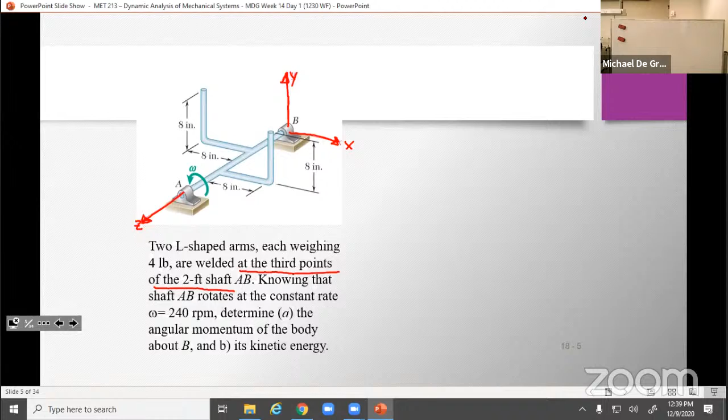Let's try that again. 2/3 of a foot. 2/3 of a foot. Okay.

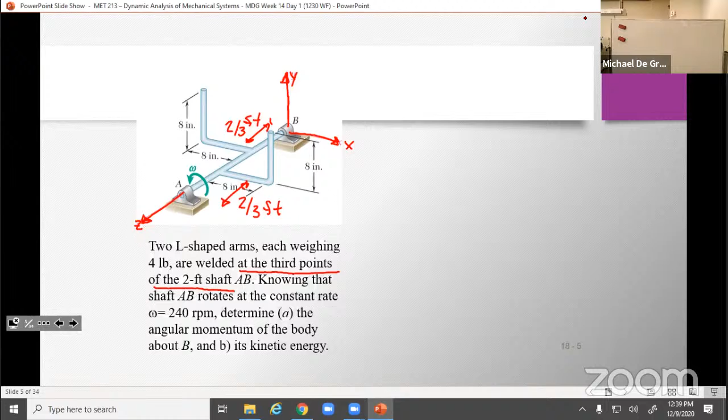So what do we do here? What's the general strategy? The part rotates about the axis AB, so everything is rotating about this central axis. First we need the mass moment of inertia matrix, so we need our IXX, IXY, IYY, IZZ. We need all those. So that's the first thing we're going to need to do.

Then we can compute the angular momentum of the rod using the moments of inertia. This is not an easy read off a table, this is going to be a complex geometry, so we're going to have to use an L-shaped rod and a regular rod to determine our moments of inertia. And we're going to compute the kinetic energy. So there's 3 parts to this: find the matrix of your moments of inertia, compute the angular momentum, and compute the kinetic energy from the angular velocity.

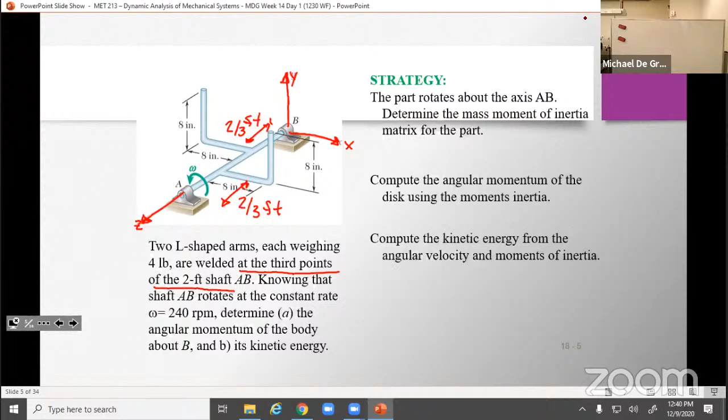Okay, so here's my thing again. What are my knowns? I know that the whole thing weighs 4 pounds, which means the mass has to be 4 divided by 32.2, which is 0.12422 pound-seconds squared per foot. That length, lowercase a, is 8 inches, which is 0.667 feet.

Omega z is equal to omega, which is 240 RPM, which I convert to radians per second. How do we do that? Multiply by 2 pi over 60 to get rid of the minutes, so we get 8 pi radians per second. We have no rotation in the x direction, there's no rotation into the board, and no rotation vertically around the vertical axis. This just rotates around z.

So we need to find HB and T. Remember, T is our kinetic energy, and H sub B is the angular momentum about point B. Since there's only rotation about the z-axis, what relationships are helpful for us?

So what relationships are helpful for us? We're going to use HB in the x, we need IXZ, so we need all of these: IXZ, IYZ, and IZ. Remember that long equation that we put up on the screen.

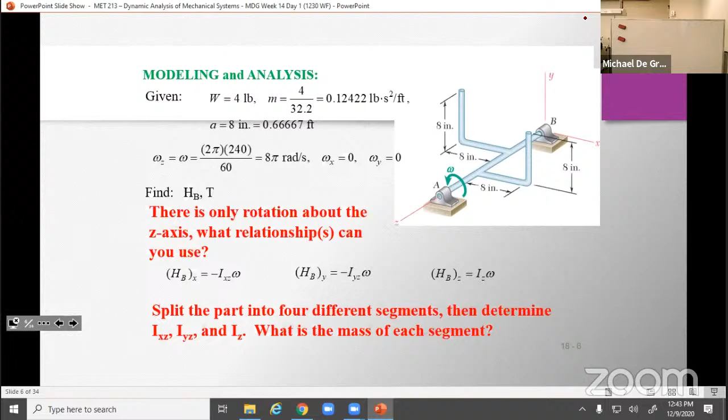So we're going to split it into 4 segments, right, that have 0.06211 pounds seconds squared per foot of mass.

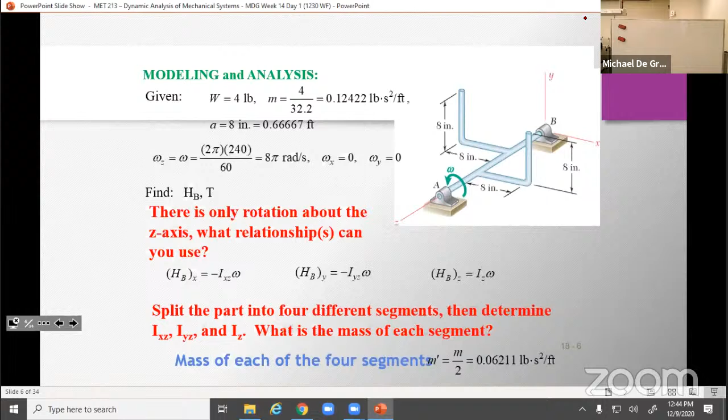So we've got to fill in this table, and we're not going to, so how do you fill in this table? You got to go into the charts and figure out where. So what are our 4 segments here? You got this segment, this segment, this segment, and this segment.

Okay, so how do we find IXZ and IYZ from these? You go into the table and you look at what it is for a bar. You know that the length is, right? And we can figure it out from there.

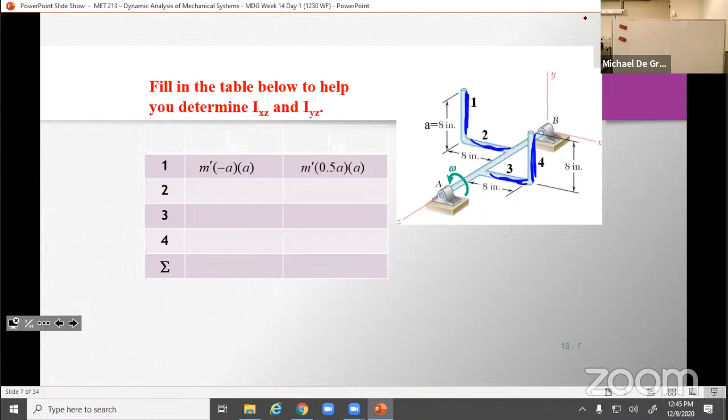So it's M prime, right? It's the mass times negative A times A, and the mass times 0.5 A times A. And this, you can't really see it here because of editing reasons, so that's IXZ and this is IYZ.

And again, this comes from the table. You go in for a rod and you see what it is, and you just go with it. We do the same thing for part 2, same thing for part 3, and for part 4. Again, these equations come from a table or a chart, which you will have if you need them.

And then we add them all together, because hopefully this is jogging our memories from statics when we first heard about moments of inertia, where you fill in the table and you have all of your composite pieces. Then if you want the total moment of inertia for something that's made of composite pieces, we add all of them together.

So if you're looking at the tables, they have pictures of the geometries and they'll identify what the different lengths are that you need.

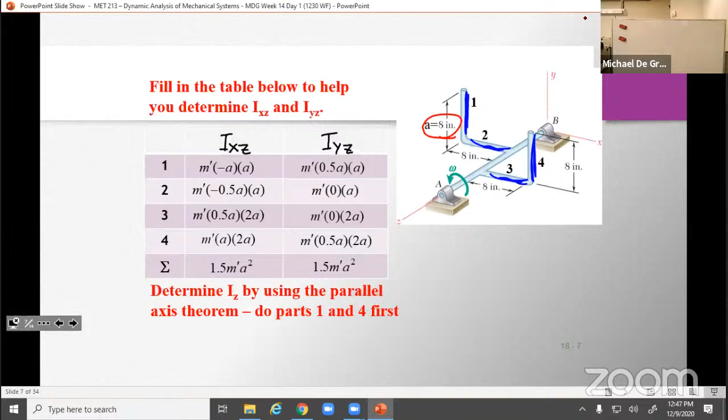And remember, what is the parallel axis theorem? It is this: it is the moment of inertia I sub z, plus the mass times the change in, times the mass times 1/2 a squared plus a squared.

So what is it? It is the moment of inertia plus the mass times the distance that you are squared, the distance that you are away from point B squared. That's what it is. Does that make sense?

Remember, each one of these lengths here was also 8 inches, because 2/3 of a foot should be 8 inches. So this is 8 inches.

This is 8 inches, and so if you're looking at how far from point B this part 1 is, that's going to be m prime d squared, but that d is 1/2 a squared plus a squared.

Parts 2 and 3 are also equal to one another, so the horizontal parts are also equal to one another, and that's just 1/3 m prime a squared.

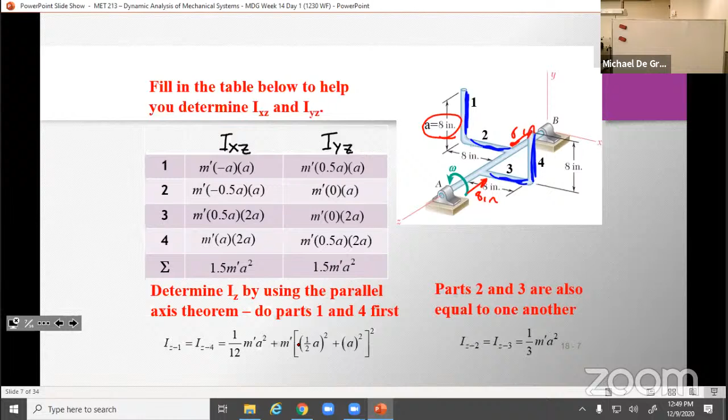Once we have this, this is important for us calculating our angular momentum h.

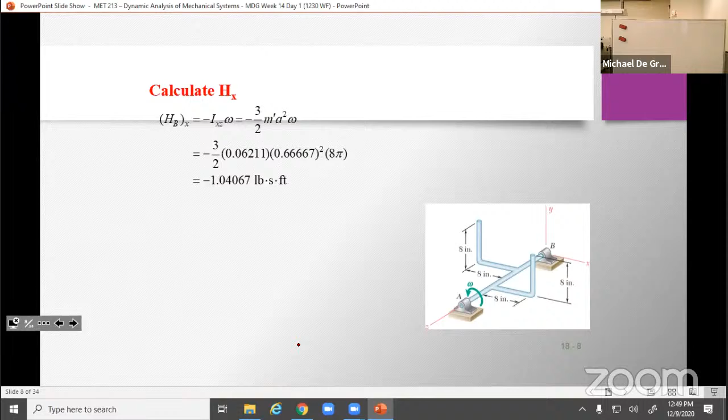So h in the x direction about point B, what is that? Well, that's going to be negative I xz omega. We know I xz, we know omega. We can plug all that in, and we get the angular momentum in the x direction.

We do the same thing in the y direction. We know the equation for the angular momentum in the y direction about point B. Look, in the x and y direction, it's the same.

And H z is about 2.3126, right? So once we figure that, the hard part here is figuring out I, what is I in relationship to point B. That's the hard part.

So my total vector is just the x component in the i direction plus the y component in the j direction, plus the z component in the k direction, right? And that's the first thing they asked us for, the angular momentum about point B.

And I know that we didn't go over how to calculate Ixx, Iyy, Izz, all the different I's, right? But most of the time, most things, even if you do composite ones, can be added back together.

You can at the very least find it about the center of gravity. Because for this thing, where would we expect the center of gravity to be? Well, if it was just the bar, it'd be in the center. These two are evenly spaced though, and opposite, so it's still going to be right about in the center. Probably lift it up off the bar a little bit because there is some mass on the upper half here. So in the z direction you'd stay the same, but we will lift off the bar somewhat, based off of the handles being there.

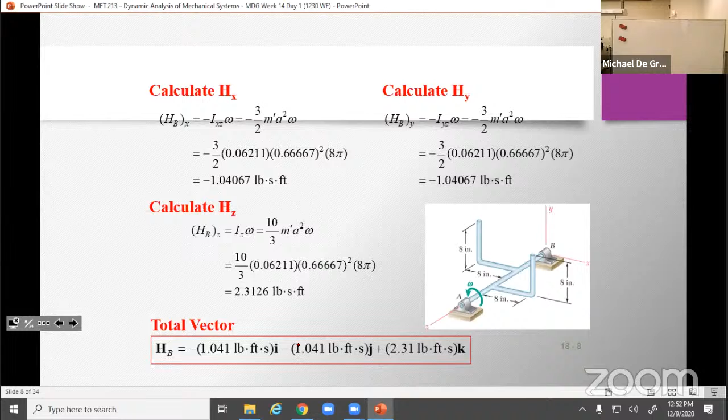What about kinetic energy? This should be a little bit simpler, right? Because the kinetic energy is 1/2 I omega squared plus 1/2 mv squared. We have to do it in all the directions, and this isn't going to be translating, so we shouldn't worry about it. This is a pure rotation.

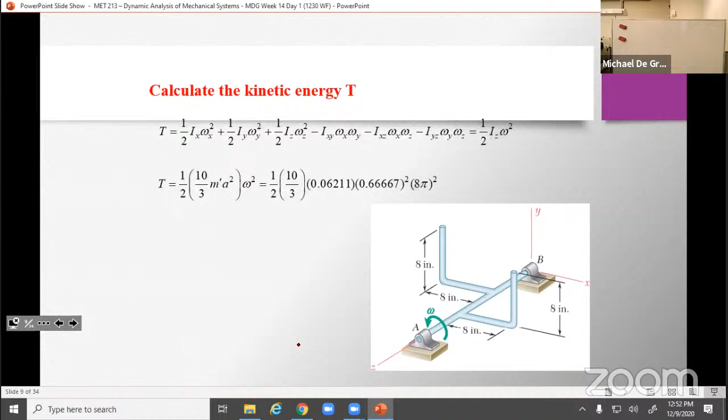So we have to take the x component, the y component, and the z component, and we have to take the off-axis components as well. We calculated all of those already. We know Ix, Iy, Iz. We know Ixy, Ixz, and Iyz. This is now plug and chug after you get I. And we're left with this.

Another thing to remember, right? Those are 0. Those are 0. Those are 0. That's 0. And that's 0. Remember, we only have angular momentum or angular velocity in the z direction. All the other ones were 0. So anywhere that omega x or omega y shows up, that goes away.

And so all we're left with, like it shows us here, is that one term: 1/2 Iz omega squared. We calculated I sub z earlier. There it is. Plug in, chug.

So again, in my opinion, the difficult part of these problems is not applying the kinetic energy formula. The difficult part here is calculating I correctly, if you have to do it. Now, we've done a couple problems where we don't have to calculate I, where we just use whatever is on the table, and that's fine too. But understanding how to come up with I—remember, if you have a composite geometry, you break it into the pieces that you know. Always break it into the pieces that you know. Like in this case, I've got a rod of length 8, in each of these cases.

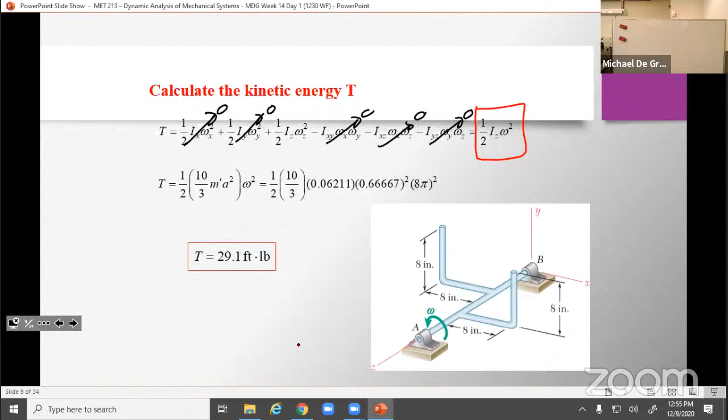So what about motion of a rigid body in 3 dimensions, right? And we've been talking about this. So angular momentum and its rate of change are taken with respect to the centroidal axes. So we measure the centroid, and the centroid has some x, y, and z prime fixed orientation. And the transformation of omega into H sub g is independent of the system's coordinate axis. Okay, so what does that mean?

Well, it just means that it's convenient for us to use a body fixed axis Gxyz, where the moments and products of inertia are not time dependent, right? So as this moves in 3 dimensions, if we have a rotating frame of reference, then we have to remember what happens when we have a rotating frame of reference. We have to do all these Coriolis effect things, right?

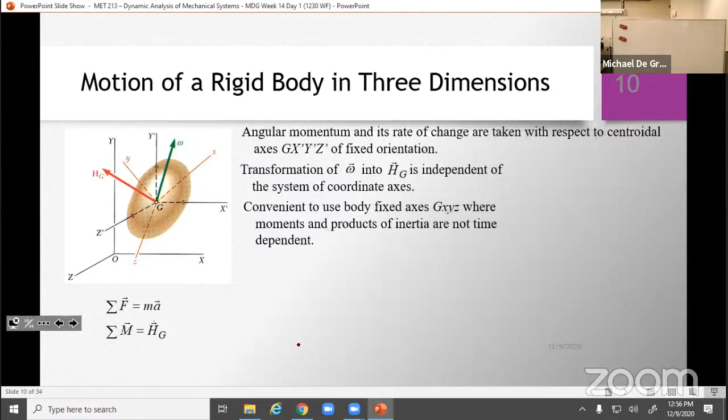We have to measure the relative position in time of this object. If we use a fixed axis, then we don't have to worry about the time dependence of this. I don't have to worry about how it's rotating and what angles it's rotating through. So we can define the rate of change of H sub G as the angular momentum about the center of gravity with respect to the rotating frame.

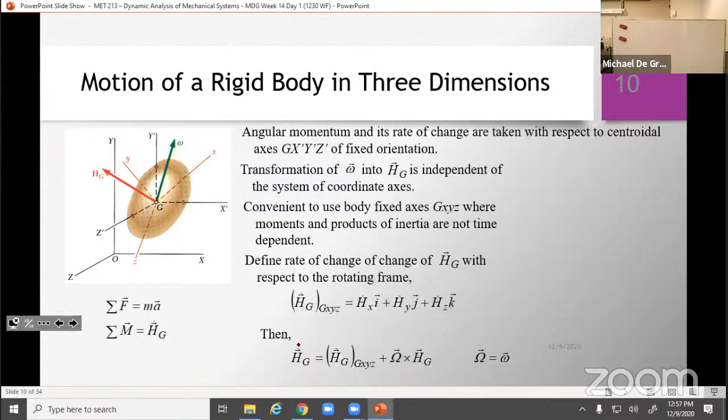And if we use this rotating frame, this is all the stuff that we talked about earlier for 2 dimensions, but we're adding a 3rd dimension. So omega is equal to omega, and Gxyz is chosen to correspond with the principal axes of inertia. And hey, look at this. These are what are known as the Euler equations, right?

So the sum of the moments about the x-axis is equal to I bar x omega x minus (I bar y minus I bar z) omega y omega z. So these are a bit more manageable than the angular momentum equations, at least I think so, because we don't have to worry about the off-axis terms. We don't have to worry about Ixy, Ixz. You just have straight Ix, Iy, Iz.

So what is this telling us? It's saying that the system of external forces and the effective forces are equivalent for general 3-dimensional motion, since the system of external forces is equivalent to the vector couple mA and HG. So the sum of my moments has to be equal to the change in my angular momentum, and vice versa.

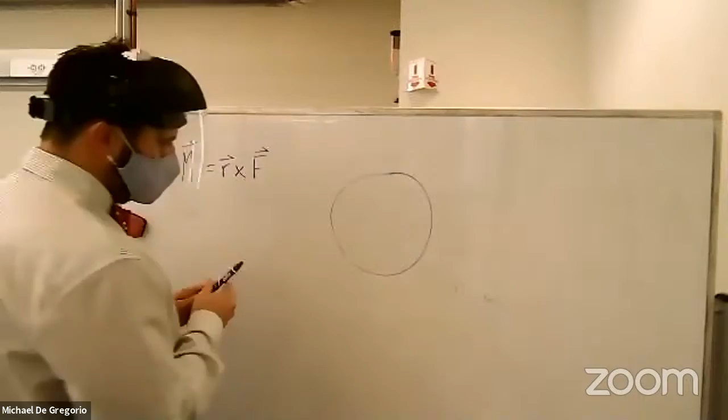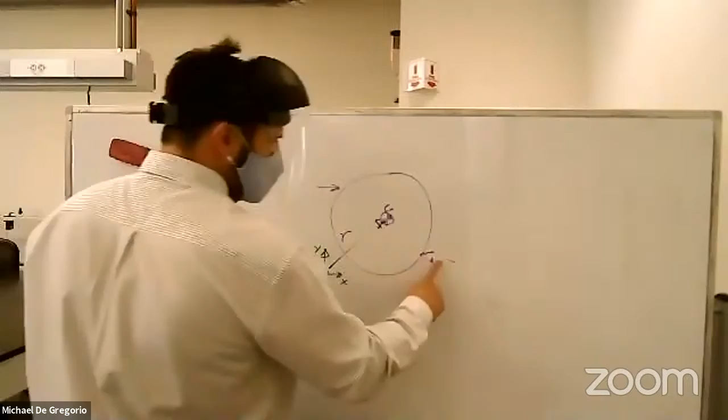Okay. So if a moment is r cross F, and say we have something that is symmetric in space. And I'm going to measure it from, here's my coordinates, something like that. This distance to G is R. No matter where I put a force, if I have a force here and here, if I break this into X, Y, and Z components, let's just say I'm applying a force here in 3 dimensions. So I've got this X, this Y, and I've got an X, Y, Z force right there.

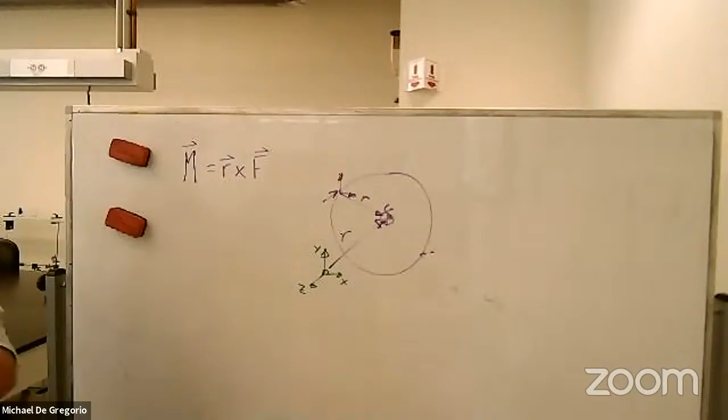That distance R is symmetric in all directions, right? This R, because it's the radius of a circle, because it's symmetric, we're going to get two portions that cancel each other. If it's not symmetric, think about it in a two-dimensional setup. Something that's not symmetric, if I apply a force here and we're rotating about there, the total distance to this point is not symmetric in two of my planes. And so I can't just cancel. I will have an x component and a y component that do not cancel.

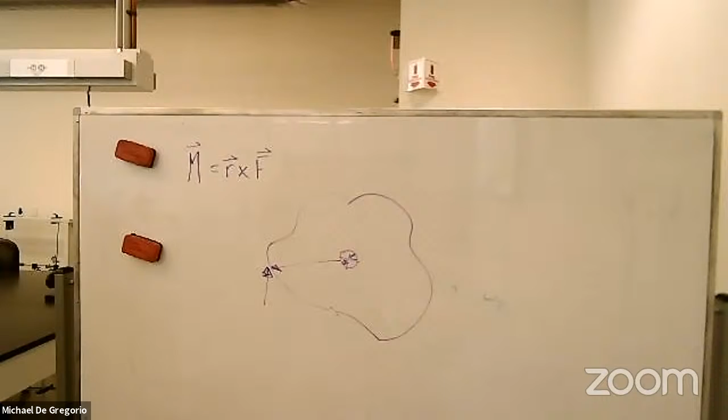So not being symmetric is not problematic, that's not the word I want to use. It's not that it's problematic, but not being symmetric makes it so that we can't just cancel things, because the x direction component and the y direction component are not going to cancel when we are not symmetric. We still have some angular velocity that plays a role.

All right, so if you had a shaft that looked like this, a rotating shaft requires both static, omega equals 0, and dynamic, omega not equal 0, balancing to avoid excessive vibration and bearing reactions. So you need the statics and the dynamics here. We need to be able to discuss the static loading. We also have to discuss the dynamic loading, when this is accelerating, so that we can determine whether or not we have excessive vibration caused by this being not a straight line.

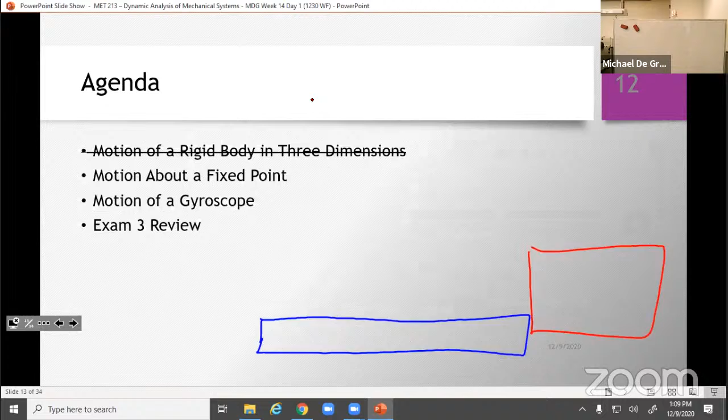Let's go back and look at them. There they are. So according to this, I'll go back and read what it said. You can use Euler's equations for the provided x, y, and z axes to find the moment. Can we?

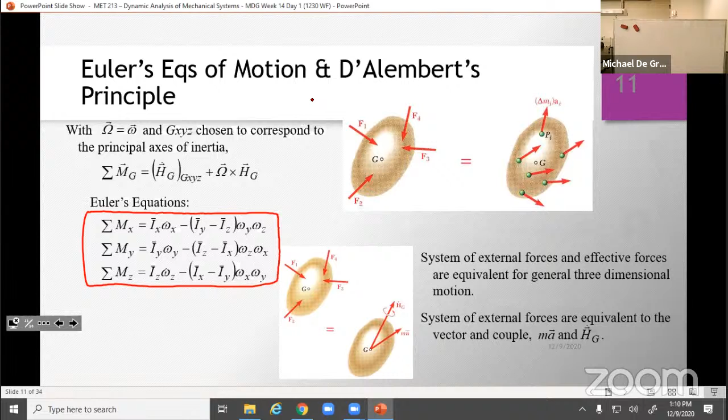Can we? Well, isn't the y direction going to be 0? The z direction is going to be 0, because we only have omega x. So the only one we're left with is the sum of the moments in the x. So I guess we could, but not super helpful.

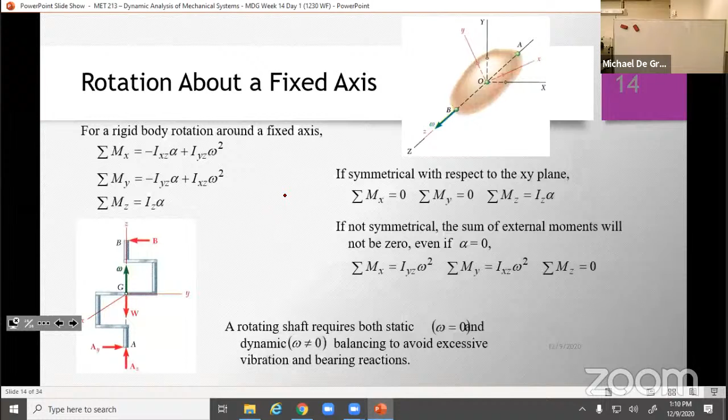The only non-zero moment will be about the x-axis. I think we've just proven that it's not, right? Well, actually we did just prove using Euler's equations that it is, right? The only non-zero moment will be around the x-axis. Why? Well, this is rotating through a fixed point. So let's go back to this equation here. Where is it? Let's go back to this one in the red box.

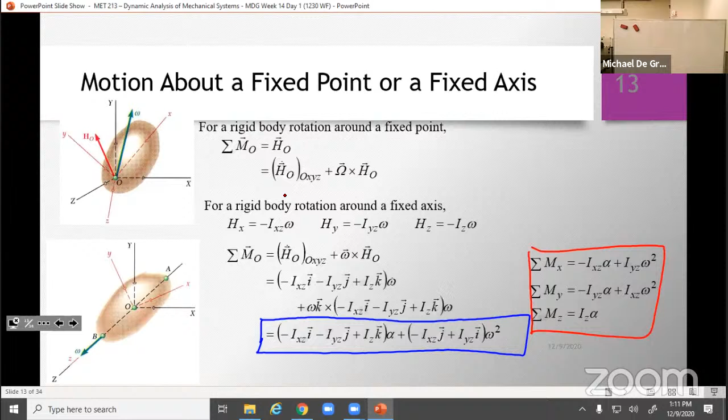All right, we're rotating about a fixed axis with the specified omega. So x, y, these are all, we can't use Euler's equations. The whole box here gives us moments in the x, y, and z direction, because there is an alpha. Alpha is non-zero, because our omega is changing with time.

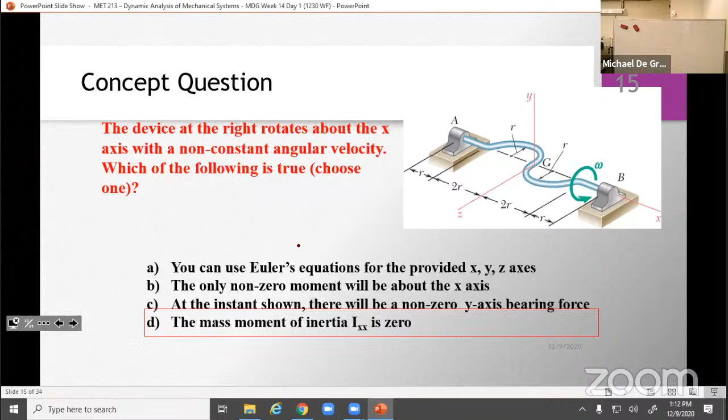So when we hear the word couple, we want to know about moments. So we're going to have to use these moment equations. A force couple. In case we forgot, draw it on the board again. Here's a generic bar, and I'm going to apply forces that are both the same distance d away from the center of rotation. That's what I've got. So I can replace both of these forces.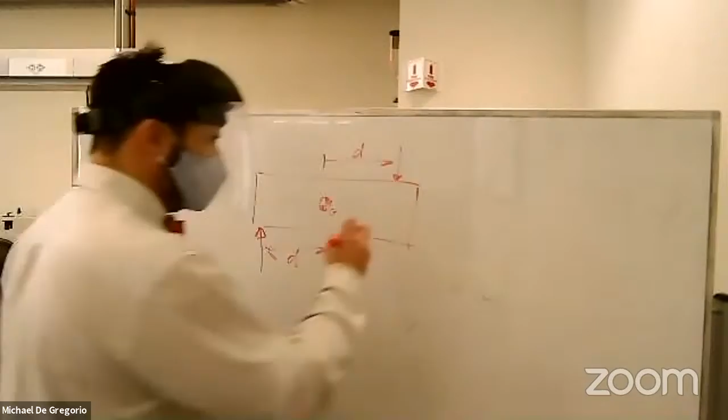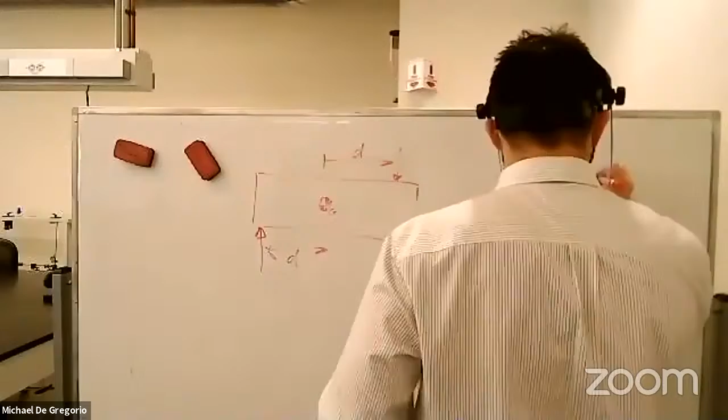This is equivalent to a system in which I have a single moment that turns this. And you can't see that color whatsoever. But there's a moment. You can kind of see it. Not really. Let's try that again. Is that any better? There we go. You can see that.

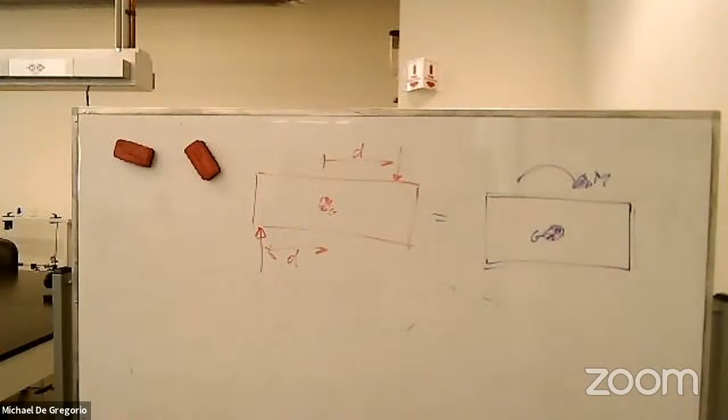So this system in red with two forces, one pushing up on the left and down on the right, is going to cause a rotation, which we can describe with this moment. So there's some moment that can be equivalent and take the place of these forces. That's what we're talking about when we say couple. So we need to find the magnitude of the couple, the magnitude of this moment that's being applied here. Right, so that's just a repeat.

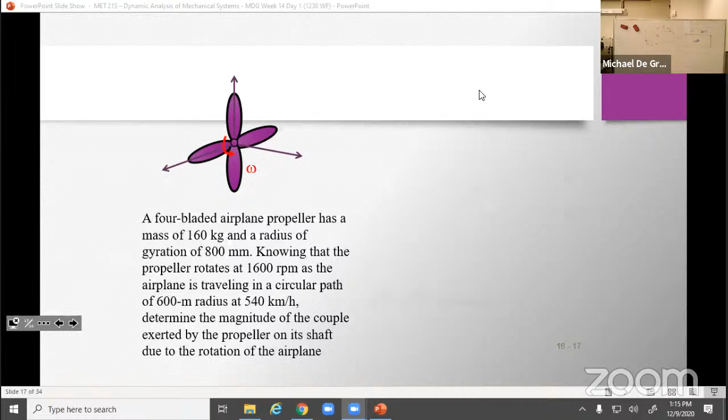So what is it that we're doing? We need to determine the overall angular velocity of the propeller. That's number one. Why do we need that? Well, remember, all of our moment equations, because this is rotation about a fixed point, have omega and alpha in them. So we need to figure out omega.

Now, what are we told right off the bat? The propeller itself rotates at 1600 RPM. So what should that tell us about alpha? What should that tell us about alpha? Then we need the mass moment of inertia for the propeller. So we're going to have to find it for all the blades and add them together.

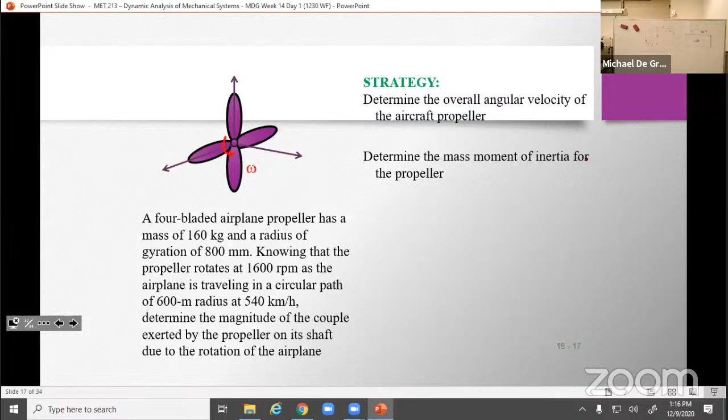And finally, we calculate the angular momentum about the CG of the propeller. Then finally, calculate the time rate of change of the angular momentum to get my moments. Because remember, my moment is just a time derivative of my angular momentum.

The mass moment of inertia, what we usually call I. I is the mass moment of inertia. So, calculate the moment that must be applied.

So this is the general thing that we're going to do. We're going to determine the overall angular velocity. Why? Because we know that in order to find anything else we've been talking about, we need omega. To find anything else, we need omega.

Everybody tracking so far? We good? Any questions? No, we're all right.

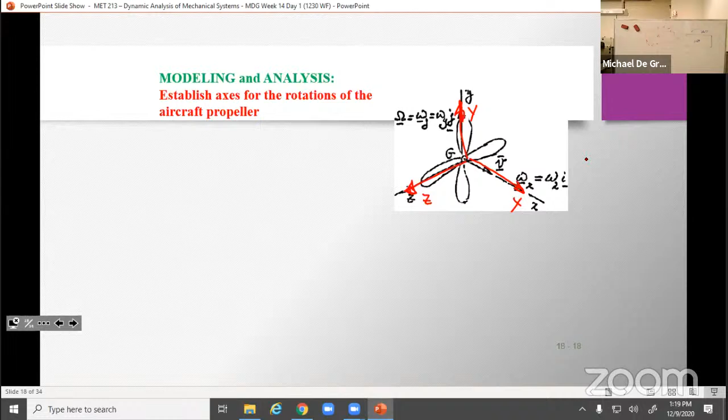So you would get this sort of pattern in space. If you were to track one point on the propeller, it would move forward and just make this circle. It would look kind of like a spiral.

So we need the x component of the angular velocity, we want omega x. We know omega x because we were told omega x. It was 1600 RPM, which we can convert to rad per second. We're going to get 167.55 rad per second.

So now we need the y component. Remember, if we're looking at the path that this airplane takes, it's this. That's not really a circle. Let's try that again. I can do a circle, maybe. Hey, that's circular-ish. Nailed it.

All right, I'm gonna go home now. You guys have been great. Okay, so this is moving in a circle.

And we've got this airplane moving around in a circle. So if we're measuring everything from the center of this trajectory, this propeller has some omega y, because remember, it all depends on where we're measuring this from. So there's some rotation about the y-axis that we need to deal with.

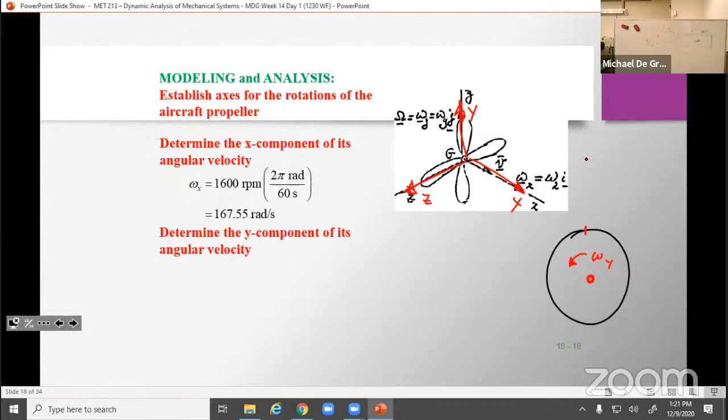So how do we find that? On our diagram, it says that's capital omega. And normally when we use capital omega, that means that's the rotation of my frame. Well, we can figure this out from the tangential velocity, v, which we were told was 540 kilometers per hour, because that's how fast the airplane is going.

And at any point on this circle, it has to have that velocity. And we know r, or rho. Did we know rho? Let's go back and look. Right, so that's the radius of curvature.

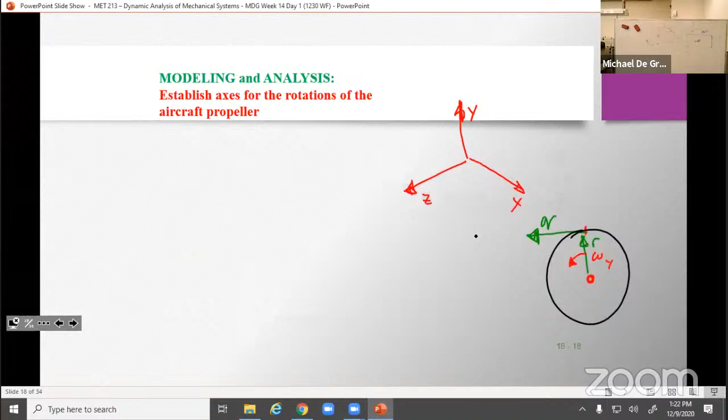And if we dig way deep, and remember back to when we talked about this—well, remember, this is two-dimensional—so omega is equal to v divided by r, which is what we got. The only thing is we had to convert 540 kilometers per hour into meters per second. That is it. But remember, tangential velocity is always omega cross r, but in 2D, that's omega times r. So if we rearrange it, we get omega is equal to v divided by r. That's where we get this.

There should be no rotation about the z-axis. There should be no forward and backward tilting. So omega z should be 0, right?

Again, how are we supposed to know this from the way this is set up? Because remember, it all depends on where you are measuring from, as with a lot of things in dynamics. It matters about what's happening to your frame.

If you're standing at the center of this curving path, the center of the trajectory that the airplane is taking, and you're watching the propeller, it's going to look to you like the propeller is not only rotating about its x-axis, but also trying to twist. That's what it would look like to you if you stood at the center of this and watched the plane, as it moves around you, the propeller itself is twisting around the y-axis.

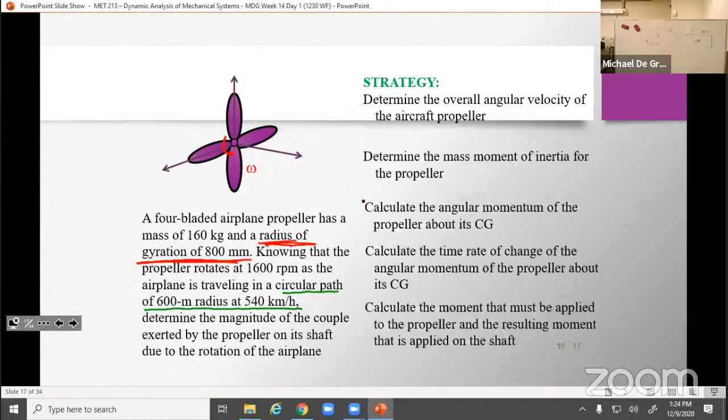This is another big thing. We were given radius of gyration. Whenever we see radius of gyration, we should get really, really happy, because when you know radius of gyration, you can immediately pick off I sub x. Why just I sub x in this case?

Because we're rotating about the x-axis. I sub x is m k bar squared. So there's I sub x. Oh, sorry. There's I sub x. So if you're given the radius of gyration, remember it's just mk squared to get I.

How are we supposed to know that this is Ix and not Iy or Iz? Because this is spinning about the x-axis. I think we did another problem a couple weeks ago where we were given multiple radii of gyration. Typically, you're being given radii of gyration when you are spinning about a fixed axis.

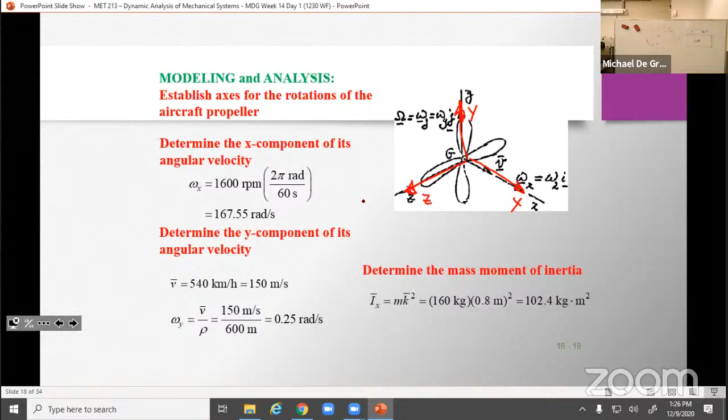Iz omega Z k plus Ixy omega Y omega X, plus all those off-axis terms. But they all go away. This is what we're left with.

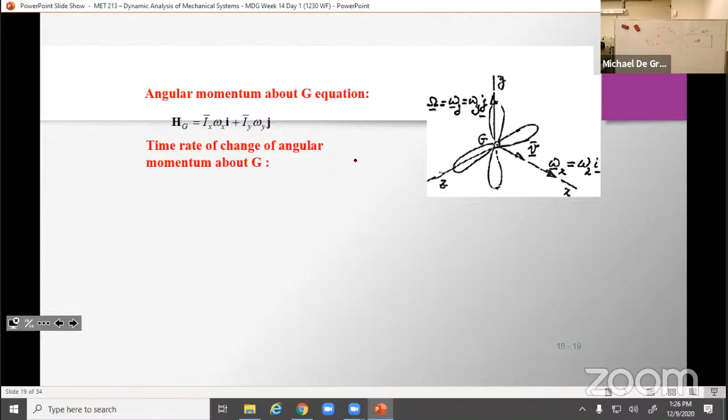So we have to take the derivative of this, because we want the time rate of change here. And if we take the derivative of this, we also know that the derivative is equal to this big equation here, H dot G, G, X, Y, Z plus omega cross H sub G.

Well, we can break it down, right? We get these equations here. We get omega cross H sub G. Omega cross H sub G is just omega Y j cross Ix omega X i plus Iy omega Y j.

H dot G of X is 0. Why is it 0? Because omega X and omega Y are both constant. If you take the time derivative of that top equation, we know that we have constant angular velocities, and constant angular velocity means we're not accelerating, which means if you take the derivative of a constant, you get 0, which is why H dot G is 0 here in G XYZ.

So we're left with this. And if we take that cross product, the only thing that we're going to be left with is negative Ix omega X omega Y K. That's what we're left with.

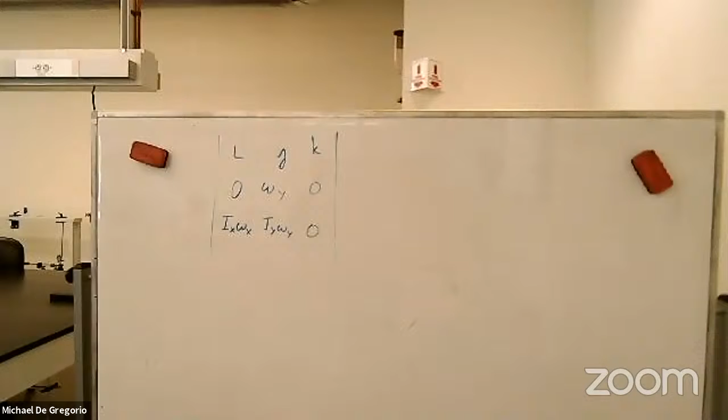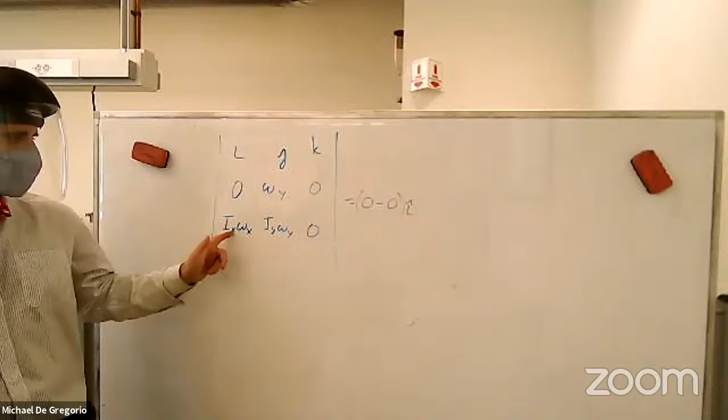Let's do that. So this is what we have. So if I take this cross product, I cover I, I'm left with 0, 0, 0 minus 0 in the I direction. All right, cover J, cover the central one, I've got 0 times 0 minus Ix omega X times 0.

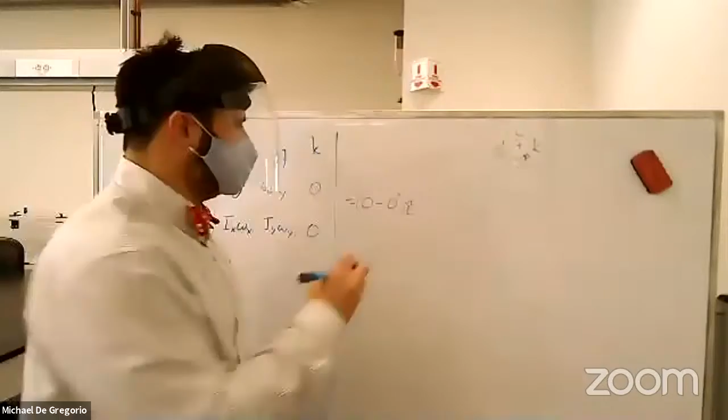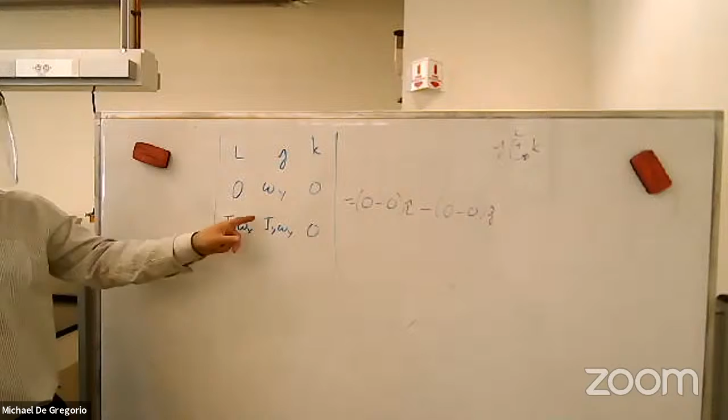All right, that's the I cross K, remember our circle, I cross K is negative J, so this is going to be negative 0 minus 0 in the J. And then finally, if I cover up K here, I've got 0 minus Ix omega x omega y.

There it is, and that's the same thing we came up with on our slide, right? Just did the cross product.

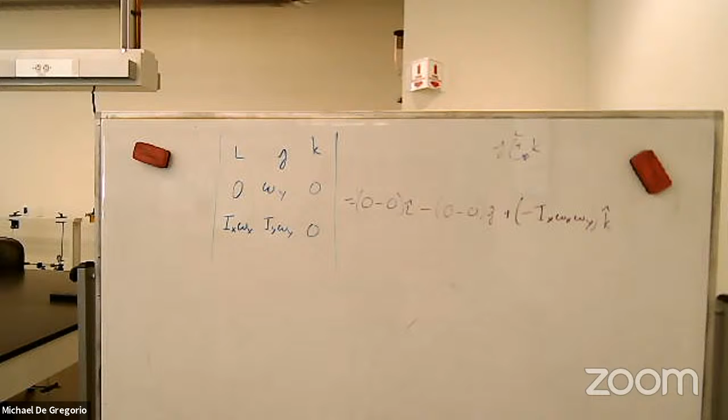So it turns out for us, we didn't calculate IY, but we also don't need IY. We can plug in for these things, solve it, and we know what the rate of change of our momentum is.

So now we need to figure out the moment that needs to be applied to the propeller shaft. Another way of phrasing this is we're trying to determine how much torque you need to apply to get this omega out, to get these speeds, to get this motion out. How much torque do I need to apply to this propeller from the shaft? That's another way of thinking about this.

So how do we do it? Well, remember, the moment is just h dot g, right? So you already found it.

So what about the force couple? What we're asked to do is find the couple that is exerted on the shaft by the propeller. So in reverse, what do we have? The propeller and the shaft are connected, so essentially we're looking for the reaction forces here.

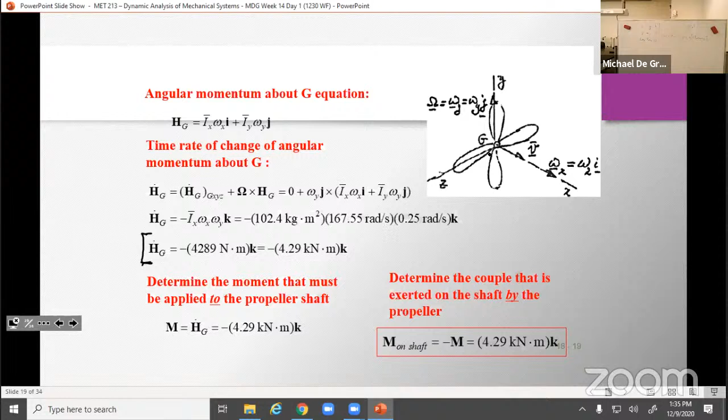Okay, so the airplane propeller has a constant velocity of positive omega in the x direction, x dot direction. The plane begins to pitch up at a constant angular velocity. True or false, the propeller has zero angular acceleration.

So you're going this way, you have a constant x rotation, constant angular velocity in the x direction. And your airplane starts to pitch upward, it starts to tilt up. Does the propeller have zero angular acceleration?

True or false? That was weird. Hope everyone's okay.

What do you guys think? Right, so here's my airplane. It's totally an airplane, it's not a marker, it's an airplane. And the propeller is turning in the normal direction. This is going forward. Then I start to pitch up, so this is going to come up like this.

Do I have angular acceleration? True or false? Who thinks it's true? Yeah, 50-50, exciting. Who thinks it's true? Who thinks it's false? Nailed it. Does not have a zero, or it does not have a constant angular velocity.

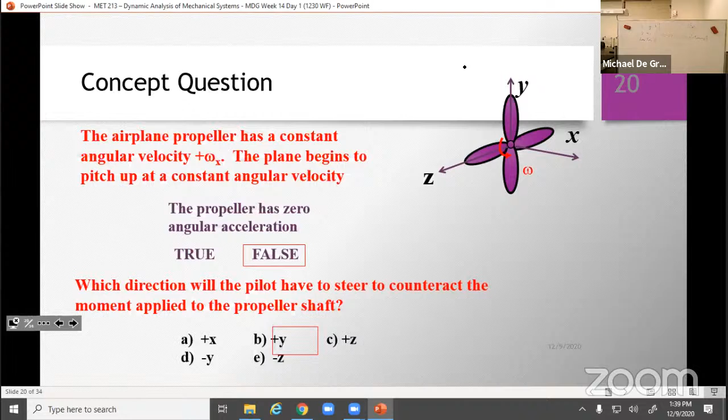Which would be a positive direction, z into x. Said that backwards. No, I said right, you have to turn right. Yeah, we're good.

Okay, any other questions? We're almost done. We're talking about motion of a gyroscope. We'll do one more problem, which I think is pretty fun to do, and then you guys can have time.

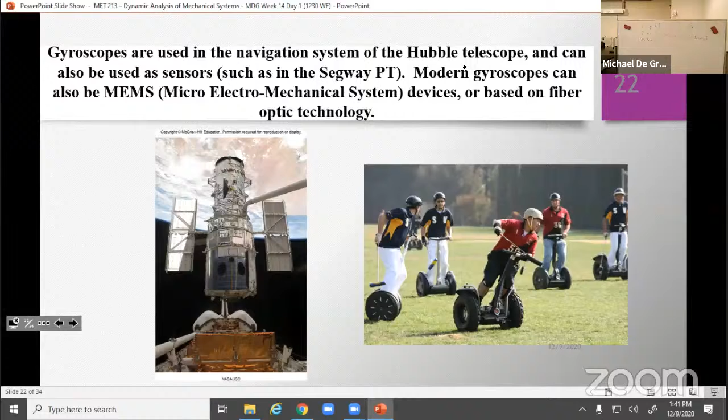So, you know, we've watched about gyroscopes, right? We watched that one video from Vsauce about gyroscopic motion. We watched the one from Veritasium, right? So what's the deal?

What's the deal with a gyroscope? A gyroscope consists of a rotor with a mass center fixed in space, but which can spin freely about its geometric axis and can assume any orientation.

Now, I don't know how big you guys are into Futurama. I'm going to assume really big into Futurama because it is just a fantastic show. I'm not sponsored by Futurama, but I'm working on it. Really, I am. But I don't know if you guys have seen this episode. They're delivering a highly explosive material to someplace in space, and the only one who can carry it is Bender because he is gyroscopically stable. Okay, what does that mean?

It means that essentially he'll rotate, but whatever he's holding will always stay perfectly still. Things will rotate around, and that's the same general concept as a gyroscope, right? We can spin the gyroscope, and the outer portions all turn, but if I move it one way or the other, it's going to stay upright. The center piece will always stay upright.

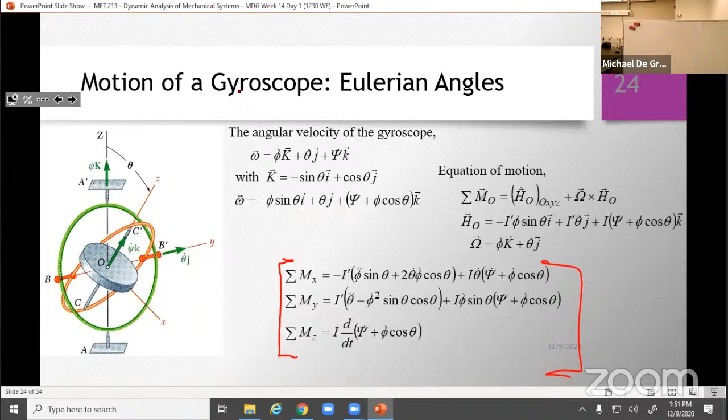So these are the Euler angles and how the Euler angles affect moments, but we can also talk about steady precession. Steady precession gyroscopes have these simplifications.

And if we have steady precession, we can say a couple is applied about an axis that's perpendicular to the precession and the spin axes. So the sum of the moment about point O for steady precession is equal to omega cross H sub O, which tells us that the resulting moment is perpendicular to the precession and the spin axes.

Wrong direction—and when precession and spin axes, excuse me, when the precession and the spin axes are at a right angle, when theta is 90 degrees, the sum of my moments breaks down to just this. Because look at the equation.

Cosine 90 is 0, last time I checked. Sine of 90 should be 1—the sine of 0, did I mess that up? Did I do that backwards? I don't think I did—that's possible, though, for sure. Sine of 0 should be 0, sine of 90 should be 1. So we're left with I times psi dot times phi dot and the J.

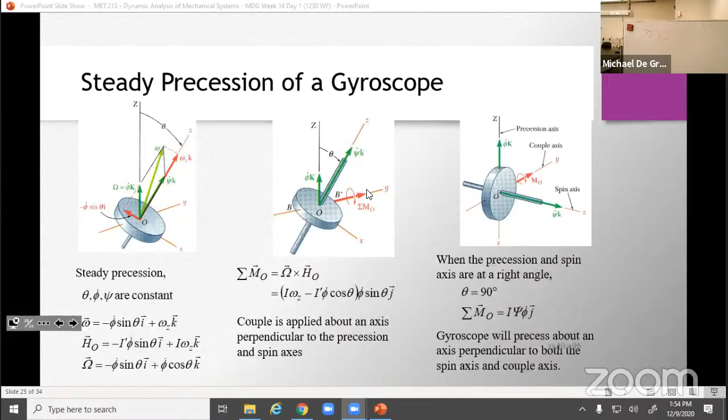Oh. Right. So if at 90 degrees, right, this gyroscope is going to precess about a perpendicular axis to both the spin and the couple axis, right? So it'll precess in a single direction.

What about motion of an axisymmetrical body that has no force, right? So this kind of looks like a rocket. Let's go with that. So let's consider the motion about its mass center of an axisymmetrical body under no force but its own weight, right? So things like projectiles, satellites, spacecraft, right? A football. Well, this technically is not true. Well, I guess after it's been thrown, right? Football, symmetric, only subjected to its own weight, right?

Any projectile, really. Well, in that case, the change in angular momentum is 0 about the center of gravity. If you have something, right, there's no forces acting on it, then you have no moments acting on it, or its own weight through its center of gravity is not producing a moment about the center of gravity, right? So H dot G is 0, so therefore HG is constant, right? And if it's constant, then we can define the capital Z-axis to be aligned with H sub G and z in a rotating axis system along the axis of symmetry. The x-axis is chosen to lie on the Z-z plane.

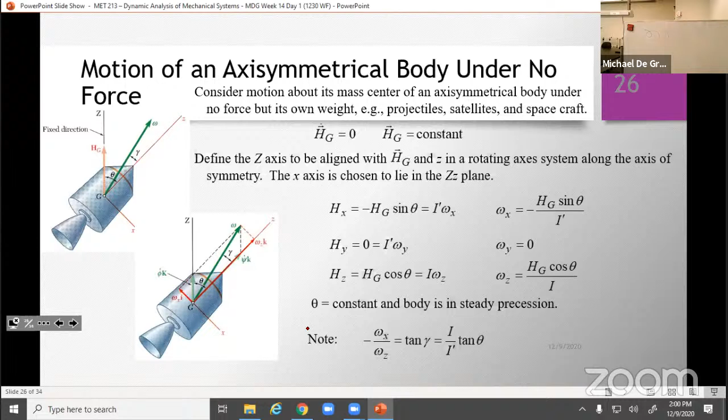Theta is a constant, and the body is in steady precession, right? So steady precession gives us a measure of stability. And note, right, the ratio of omega x to omega z is equal to the tangent of gamma, which is just I over I prime tan of theta. Okay, so note that.

So there's two cases of motion for axisymmetrical bodies under which no force is involved, where we get no precession. First, the body is set to spin about its axis of symmetry. Omega x is equal to hx is equal to 0. So omega and HG are aligned, and the body keeps spinning about its axis of symmetry, which is ideal, right? It's kind of what we want.

That's what you're aiming for with anything that you want to travel long distances, right? And that's this case. Everything is moving that way. And the second case is the body is set to spin about its transverse axis. So in this case, it's set to spin the bad way, but there's also no precession.

The body keeps spinning about a given transverse axis. So this rotates like this, because we're rotating about this axis. It's going this way. This one rotates like this. Top one rotates about its symmetric axis, which is okay, but there's no precession, right? And that's problematic because if there's no precession, it means we're not moving forward.

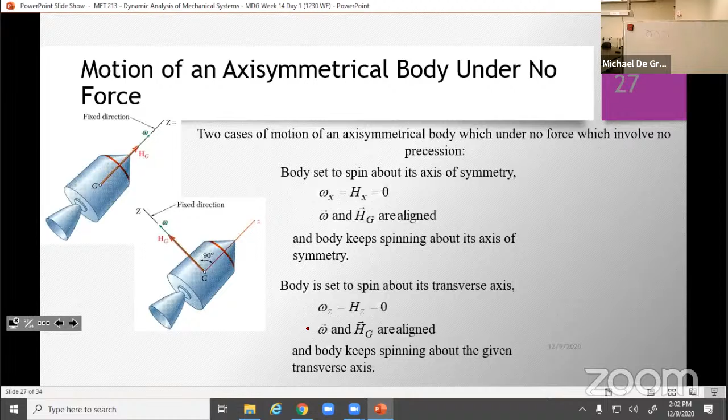There's a reason we call it precession, right? There's a reason why people call parades processions, right? Because they're moving forward when we precess.

We can extend this concept to 3 dimensions. Well, I guess it's already been extended. But the motion of a body about a fixed point or its mass center can be represented by the motion of the body cone rolling on a space cone. That sounds weird. What does that mean? So in the case of the precession, the 2 cones are circular. So imagine for a second you've got this space cone.

So the body cone represents what the motion of the actual body is going to look like, and the space cone represents its motion relative to a fixed point in space. So the body cone represents the motion relative to the body itself, and the space cone shows you how this is going to move with regard to some fixed case.

And so it turns out that when I is less than I prime, we get an elongated body. So gamma is less than theta, and the vector omega lies inside of the angle ZGZ. And the space cone and the body cone are tangent externally, and the spin and precession are both counterclockwise from the positive z-axis. And we call this a direct precession. So direct precession is when these 2 cones are tangent to one another. This top case, we call that direct precession.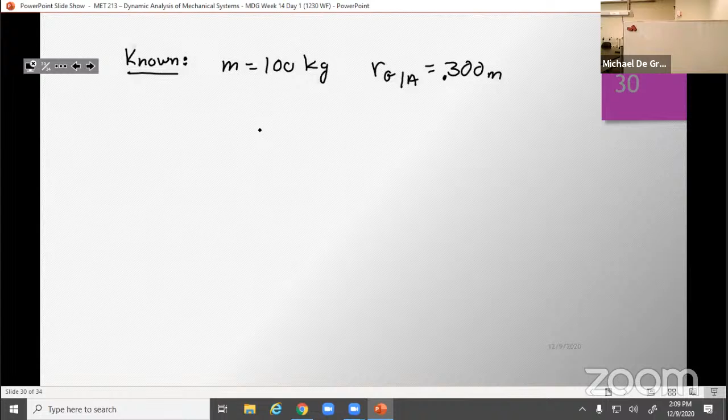And this distance from here to here, that's r of G with respect to A. And put this down in my knowns. r of G with respect to A is equal to 0.300 meters, in the I direction, right? 300 millimeters, 0.3 meters in the I. Yeah, I drew my arrow the wrong way. It's going from A to G, right? G with respect to A is I'm at A, I want to get to G. How do I get there? I walk 300 millimeters in the I direction.

I also can say that my vector for velocity, script V, is equal to V cosine of theta in the I minus V cosine of theta in the J. So where did that come from? Well, here, this is V. Here's V, right? But I need this in terms of X and Y. And so V sub X and V sub Y. I know the angle here is theta. This is a right triangle, right?

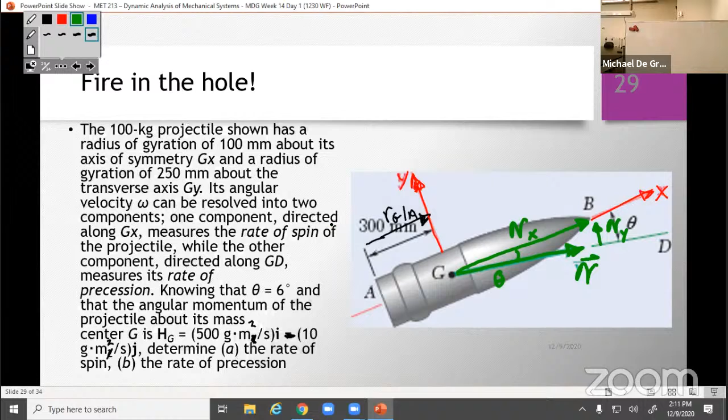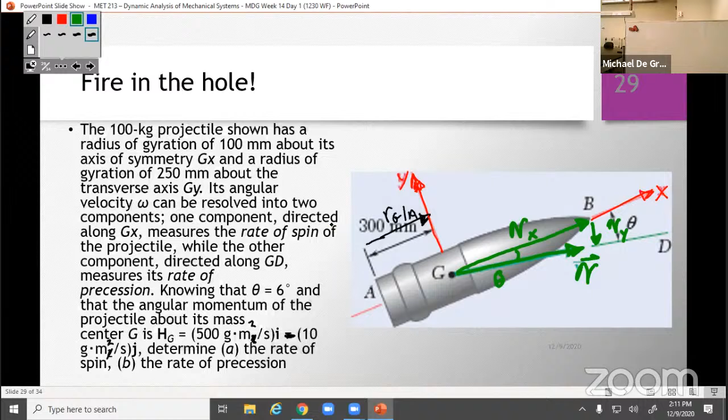But really, I drew it in the wrong direction again, for reals, because it goes there to there, right? So I've got Vx, which is V times cosine theta, minus V sine theta in the J, right? Which is where we came from. So we're just doing a little light trig on a Wednesday afternoon.

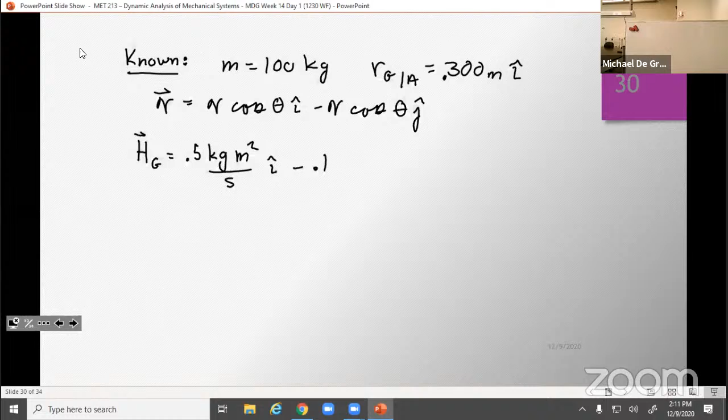What else do we know? Well, we were told that H_G was equal to 500 grams, which is 0.5 kilogram meters squared per second in the I, minus 0.1 kilogram meters squared per second in the J, right? I just converted to kilograms. Remember, we want to be in base units.

I'm looking at the wrong problem. Yeah. That was great that we did all that. We don't need some of those things though, guys. I'm sorry, I was looking at my wrong notes. But it's good, we got those things. We still need them, but it's better that I found out now than later.

What else do we know? We know that K sub X was equal to 100 millimeters, which was 0.1 meters. And K sub Y was 0.25 meters. So we're asked to find the rate of spin and the rate of precession. Well, remember, these are the things we know. This is everything that we know. We're not going to need r of G with respect to A, right? Or maybe V, but everything else comes into play.

I was looking at the follow-on part of this question, which was determine the linear momentum. So, determine the total momentum. This is what we need, right? These are the things we need. So what should we do?

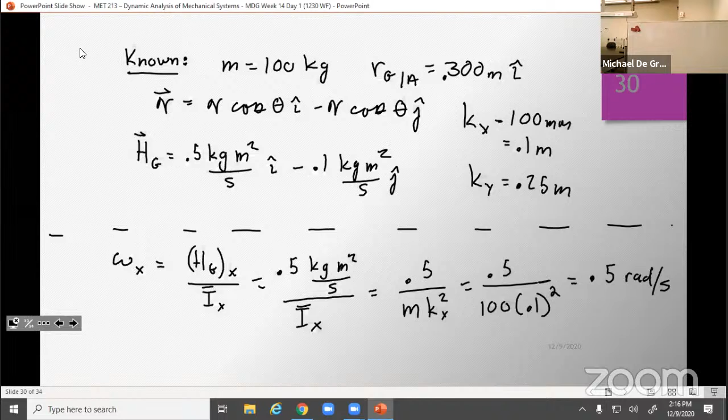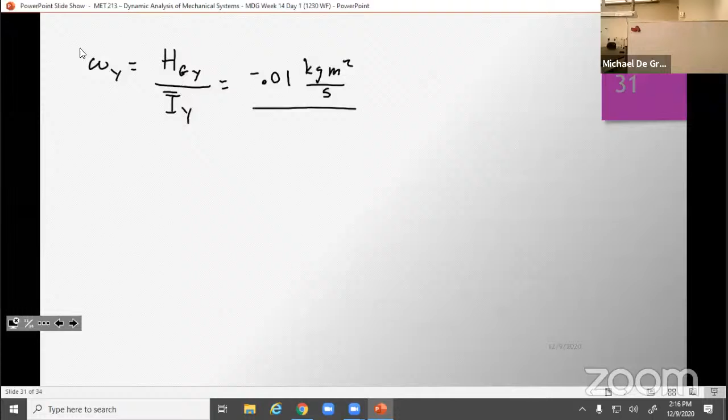The equation that we developed for omega y told us that it was hg in the y direction divided by I bar y. In this case, this is going to be negative 0.01 kilogram meter squared per second divided by the mass times ky squared, 0.01 divided by 100 times 0.25 squared, which comes out as negative, that's negative 0.0016 radians per second. And omega z in this case is 0. We have no omega in the z direction.

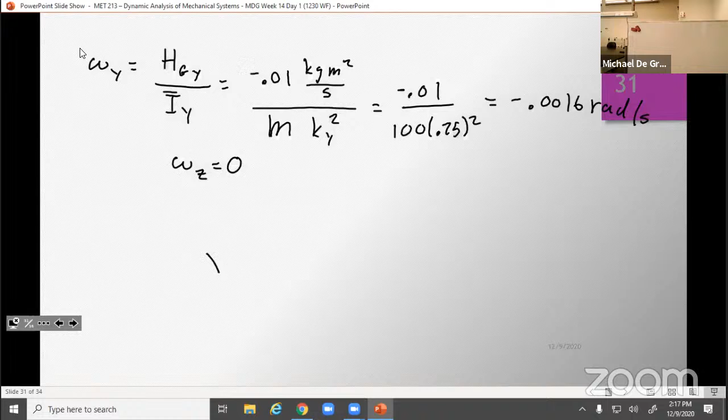So, what do we have? Here's my projectile. I know omega x. And I know omega y. There's my projectile.

Okay, but what I really want to know is omega p, which is my rate of precession, and omega s. Those are the two things that I really want to know. And we found out that omega y was actually negative, so I have this arrow pointing the wrong way. It's actually this way.

Well, can't I just move omega y here? Isn't that just the same thing? And I know this angle here, this is going to be theta. So it turns out that omega p is equal to negative omega y divided by the sine of theta. Theta was 6 degrees. So this is negative 0.0016, negative times negative 0.0016 divided by the sine of 6 degrees. So omega p comes out as 0.015307 radians per second.

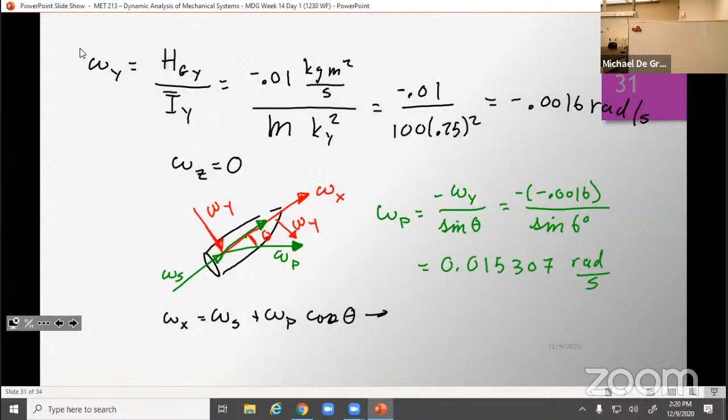And we can say that omega x is equal to omega s plus omega p cosine of theta. So omega s is equal to negative omega p cosine theta plus omega x. So we're going to take omega p cosine theta and subtract it from both sides. Omega p cosine theta turns out to be 0.5.

Sorry, no, omega x is 0.5. There we go, right from the last slide. Omega x, 0.5 radians per second, minus 0.015307 cosine of 6 degrees. So the big reveal, after many, many mistakes, omega s is 0.485 radians per second.

And this is omega. So those are the two things that we need. That's that. Donzo.

Here we are. So we use a little trig, right? Didn't really need very many complicated identities outside of that. We didn't really need to know all those IXX, IXY, IXZ things. All we needed was K, and we needed those equations for omega X, omega Y and omega Z that we came up with for steady precession. How do we know this is steady precession? Because projectiles act under steady precession since they are not acted on by anything other than their weight.

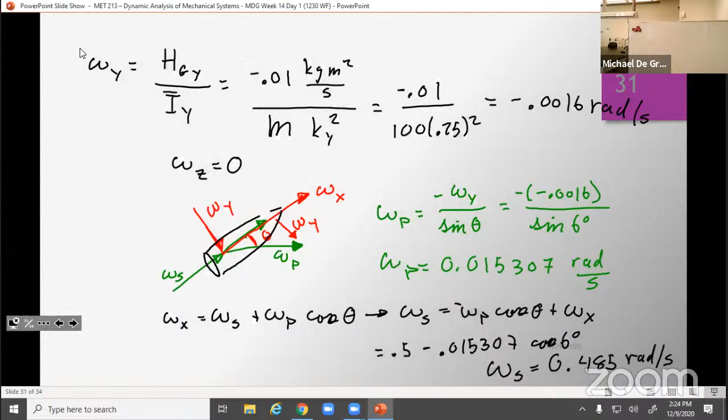Nothing? Oh, that's it, guys. That's the whole semester. That's it. We still have classes. I'll see you guys again.

I'll give you the whole spiel about how you can't get rid of me that easy and all that. I'll see you again next semester anyway. But anyway, I don't think there's anything else. If you guys wanted to use this time to work on your projects and talk to each other about it, that's fine. If not, if you have any other questions, let me know. But otherwise, we're done for today. That's it, I don't have anything else planned.

So Friday is the exam. And what about next week, Wednesday? Good question. So Friday is the exam. Next week on Wednesday, we will go over the exam. We can talk about that, but typically I leave that as a day where you guys can work on your projects together, so you have dedicated time to actually talk about projects. If you haven't tested by then, I'll ask the lab staff to bring the compressor in, and we'll test our wind turbines, right? Typically it's a shorter class, but overall you would just use it as time to work on your project.

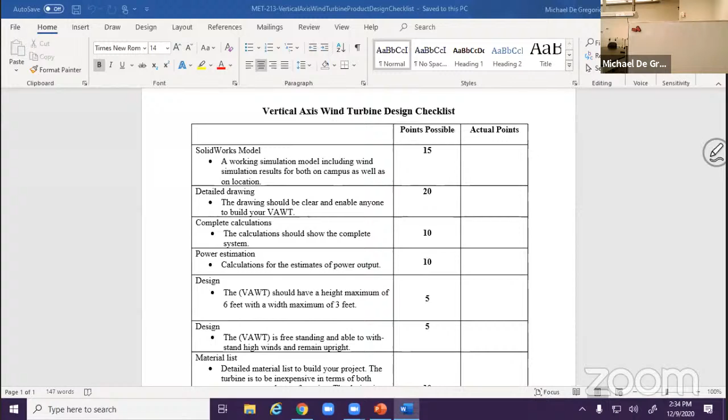And then the materials list, right? So obviously it's like a standard BOM - parts, number that you need, cost. And then I will provide instructor comments, that's not for you guys, so don't worry about that. All right, so is that a little bit clearer about what's expected here?

So it's kind of a mini design paper, right? It's not... so any references that you might come across, please use citations to deal with those. Nowhere is it explicitly required, but if you found a calculation in a textbook somewhere, just cite it. It doesn't take long to do, and protects you - if that's somebody else's work, we should acknowledge that.

Okay, so that's the design. So let's go over the presentation rubric, because why not? We're here, and we've got time.

Heck, we'll go over build and test too. Why not? Okay. All right, we'll try doing it this way.

So dress a little nice, you know, like business casual, golf shirt, the fanciest mask that you have for the occasion, all that. Maybe go out and get some really fancy black tie surgical masks or whatever. I know it's a bad joke.

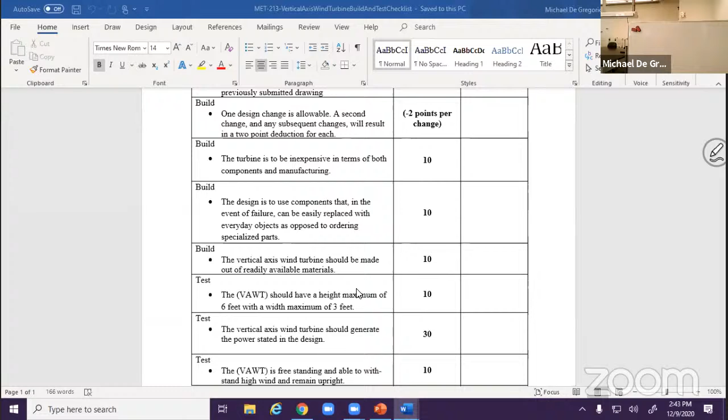So there's that. The vertical axis wind turbine should generate the power stated in the design, right? So you need to come into that day with a number, right? How much power do you think you're going to generate? And you have to tell me, and then we're going to run our test, and then you're going to calculate how much power you actually generated, right? And if you're close, you get all the points, right? And if you're not close, you're way off, then you won't get as many points, right?

The VAWT is freestanding. So the way that we run this, if we're doing the wind tunnel, is you have to survive 70% maximum capacity of the wind tunnel.

That's a great question, I don't remember. We haven't, of the ones that we've tested in there, we haven't had any issues. But then just for funsies, we crank it up to 100 after. So if you survive 70, that's good. And then just for fun, we see what happens at 100, because it's fun to break things sometimes, right?

It's also fun if it doesn't break, so. What kind of fan is it? Is it like an office fan? Is it like an industrial, like jet turbine? It's not a jet turbine, Zach, but it's a large fan. You can go, if you want to go and peek in the window, it should be in the classroom right below us. Just kind of, I know there's classes in there right now and the rest of the day, but you can kind of peek in and see it in the back. It's a decent sized wind tunnel, right? It's decent.

For being made by a senior capstone group, they did a good job. And then last year they kind of did some finishing to it, so I'm kind of excited to see what they did and how it looks. Yeah, Logan?

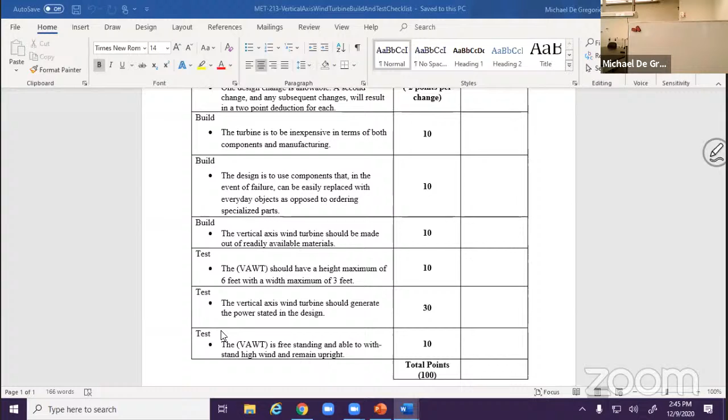No, good try, man. All right, yeah, what's up? What's up? What? Why not? Okay, so all right.

When I was at ASU, ASU gives out A+ as a grade. Which I am fundamentally opposed to, because you can't do better than 100%. How do you do better than perfect? I'm not saying that you can't ever get a perfect score, I do believe that that is possible, and I've had very rare cases where people have done perfect work and gotten perfect scores. But how do you do better than your best, right? So the same thing applies with extra credit, right? How do you get extra, like, in my mind, in order to get the extra credit, you need to have earned all of the original credit before you can get extra.

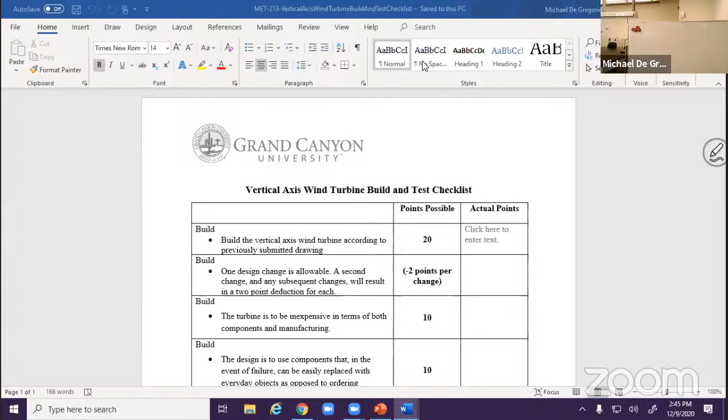Now it's not built in here, and I'm not comfortable putting it in, to be quite honest. Especially since the way that this project works is likely going to change in the next couple of semesters. So that's my story, sticking to that. Okay.